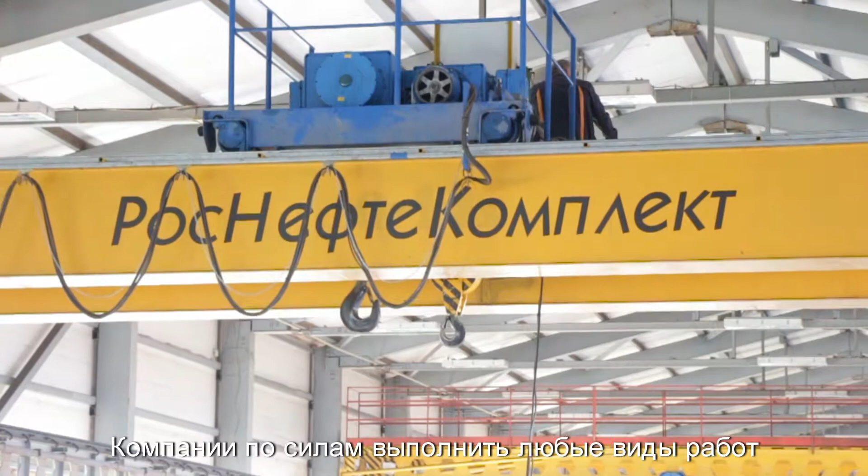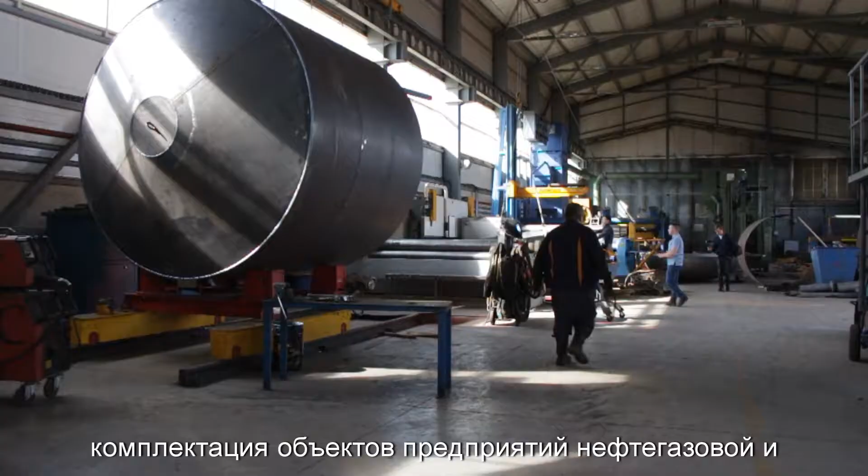At the moment, ROSNEFTEKOMPLEKT has a wide range of services. We are capable of fulfilling different activities: construction and reconstruction, fabrication of packaged products, fabrication of tanks and vessels, fabrication of steel structures.

Engineering procurement for companies in petroleum and power industries. R&K is a big and coordinated team. Our specialists have got everything to resolve process tasks of any complexity: professional knowledge, high working efficiency and commitment, pursuance of perfection and teamwork skills.

Engineering and technical staff possess high-level background and are able to perform timely and qualitatively the whole range of works related to construction of process facilities in the petroleum industry. ROSNEFTEKOMPLEKT performs as a general contractor while implementing large-scale projects on a turnkey basis.

In order to fulfill construction and installation activities in full scope, the company is equipped with special equipment and machinery. Total number of available equipment and machinery owned is over 100. For the time of operation, ROSNEFTEKOMPLEKT performed a great scope of engineering, construction and installation activities.

Our clients are international companies such as MOL Group, Vostok Energy, Transneft, Rosneft Oil Company, Lukoil, Tatneft, Gazprom Neft, Sibur Holding, Irkutsk Oil Company. ROSNEFTEKOMPLEKT owns 2 bases for engineering support services with a total area of 5 hectares.

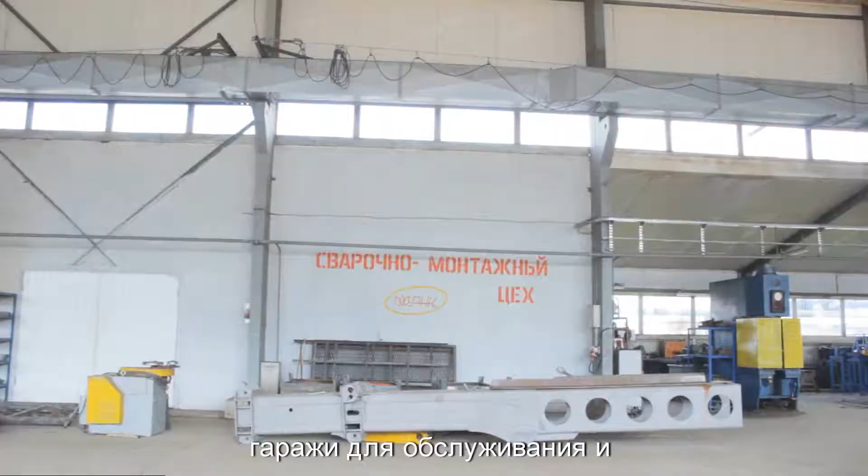These have warehouses, maintenance workshops and special machines, fabrication shops for modular packaged units, tanks and vessels, steel structures and process units. The shops are equipped with all required machines as well as welding, process and lifting equipment.

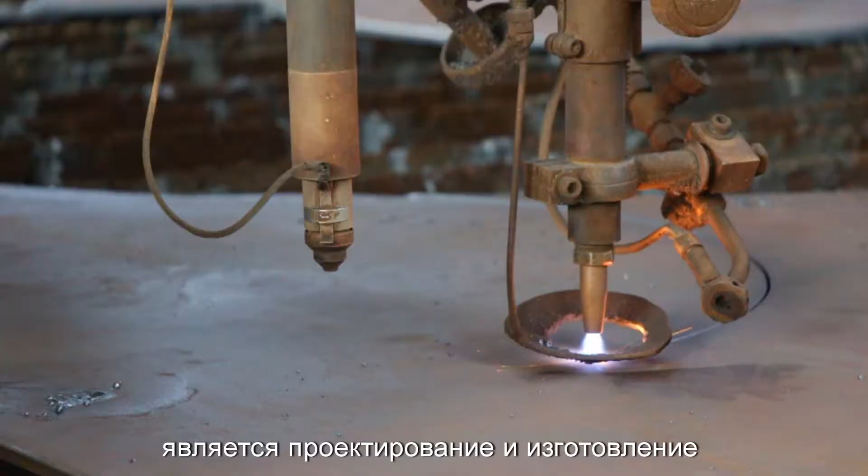One of the company's streams is engineering and fabrication, followed by installation of modular packages. All products are ready-to-operate products that require minimum assembly on a construction site.

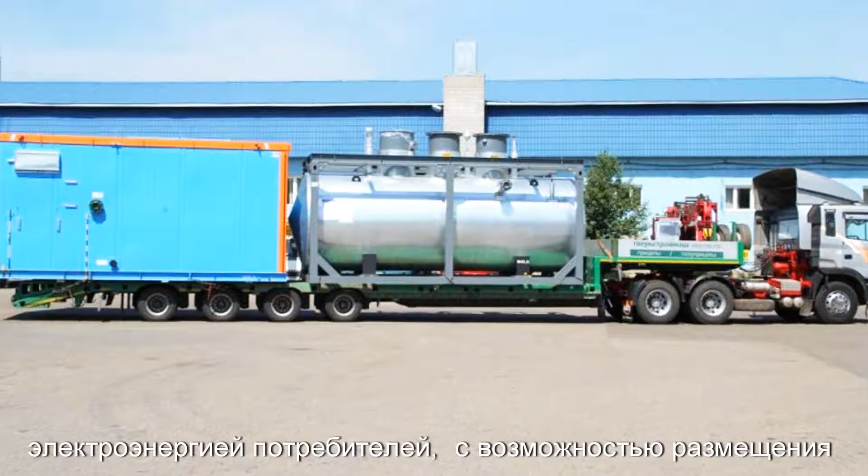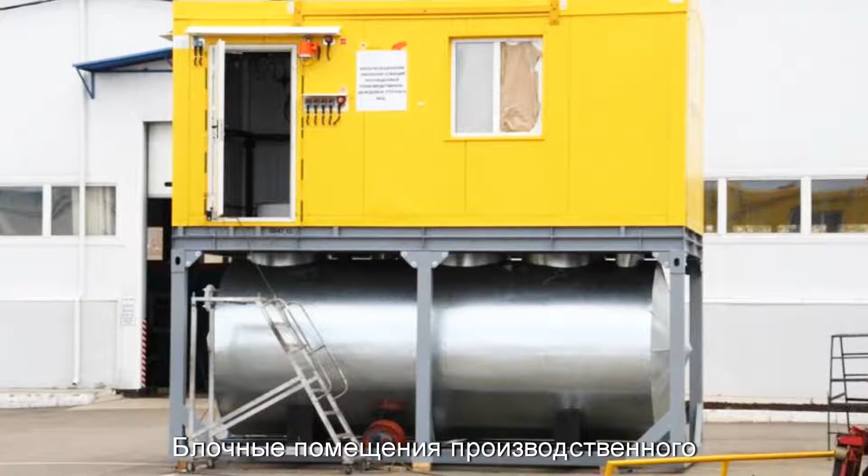Quality and quantity metering stations in a modular container, diesel generator stations in modular containers to provide clients with power, an option to allocate distribution gears and communication relay stations, modular packaged premises to allocate process equipment adapted to maintain required climate conditions, modular pumping stations for oil, water and chemical pumping, modular premises for production and household use, control rooms, laboratories, checkpoints, workshops, modular containers for warehousing and accommodation.

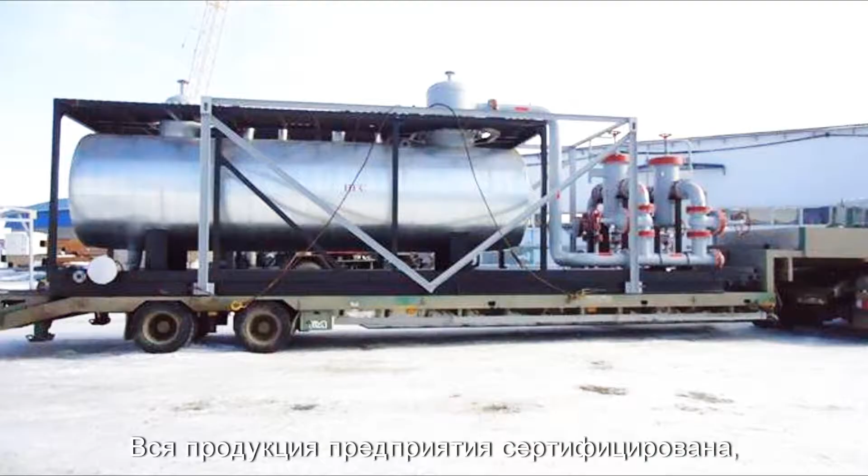The products are fabricated in accordance with technical regulations and standards. All company products are certified and ISO 9001-2000 has been implemented. ROSNEFTEKOMPLEKT has grasped technologies and certified production of tanks and vessels.

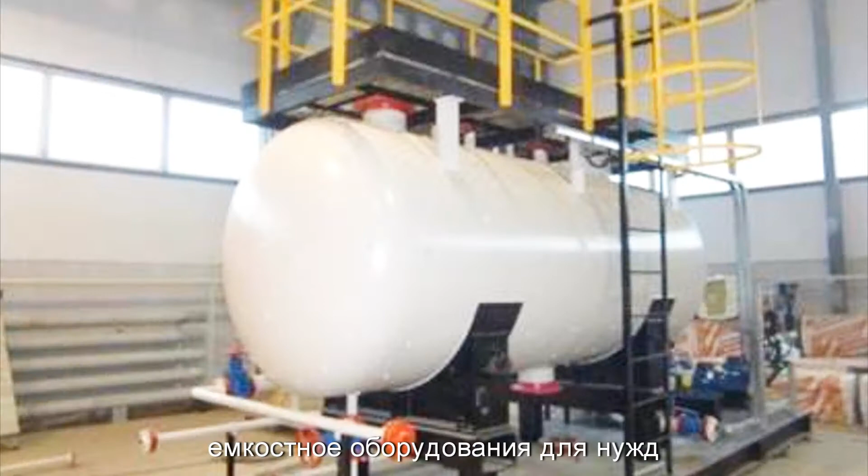Steel welded tanks and vessels production line is set up. Standard and non-standard vessels and tanks are fabricated for the needs of refineries, gas treatment plants, chemical industries, for construction of gas and oil pipelines, as well as a wide variety of industries where tanks and vessels are required.

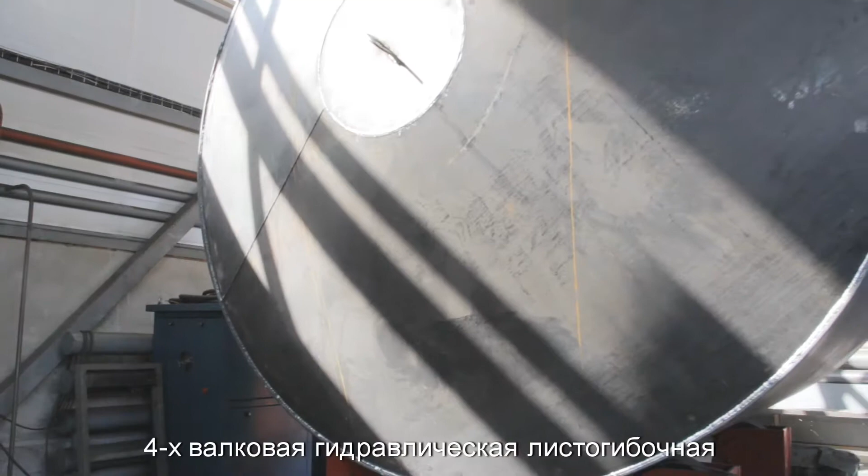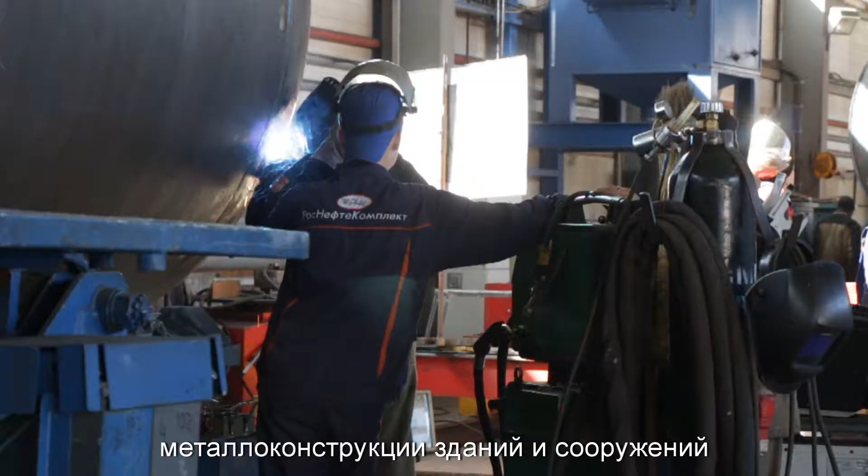ROSNEFTEKOMPLEKT fabricates steel structures of any complexity such as steel structures for buildings and facilities, columns, beams, trusses, framework, crossbars and stands, bracings, stairs, platforms, guards, pipe racks, floodlight towers and lighting rods, pipe supports, steel fences and enclosures.

Special equipment is used during steel structures fabrication: plasma cutters for cutting of all steel grades, guillotines used for steel chopping, and welding equipment.

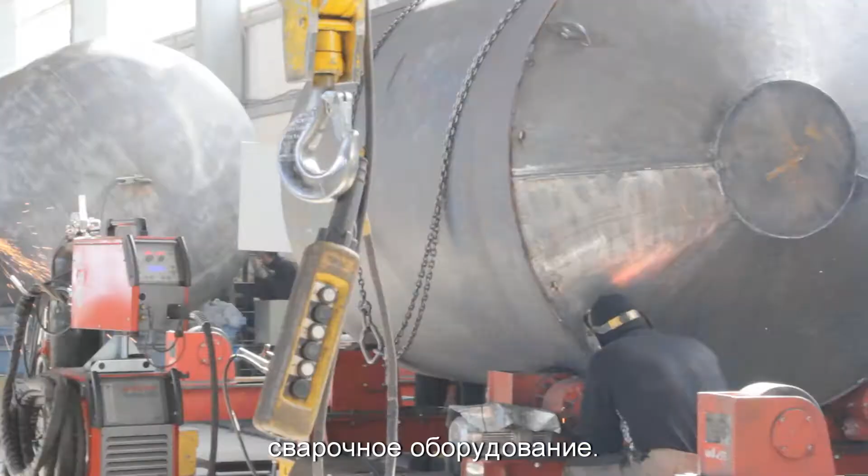The company is capable of producing 500 tons of steel structures per month, and this is not a limit. An ambitious program of re-equipment will double the efficiency due to upgrading of existing capacities. 5 to 6 thousand tons of steel structures are produced from the shops annually.

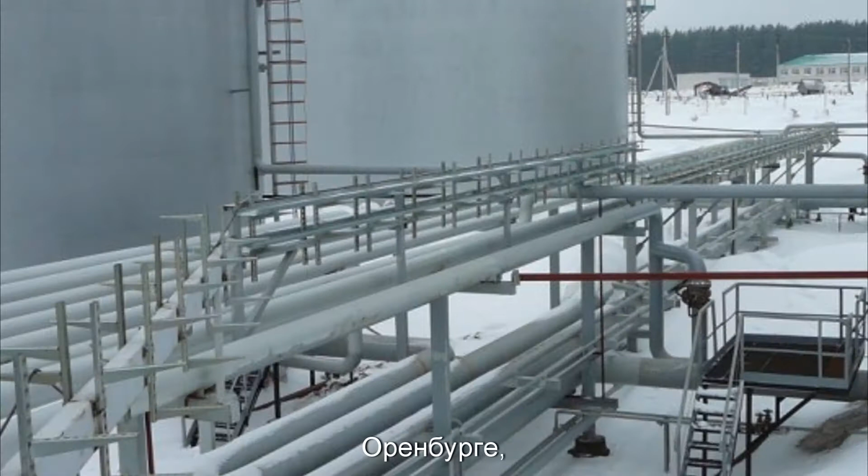The geography of the company is also impressive. The team has worked in Samara, Syzran, Krasnoyarsk, Orenburg, Perm, Saratov and other Russian cities.

We fabricated and installed 5 tanks, process equipment, pipelines and offsite interconnecting pipe rack. Ground leveling was also performed.

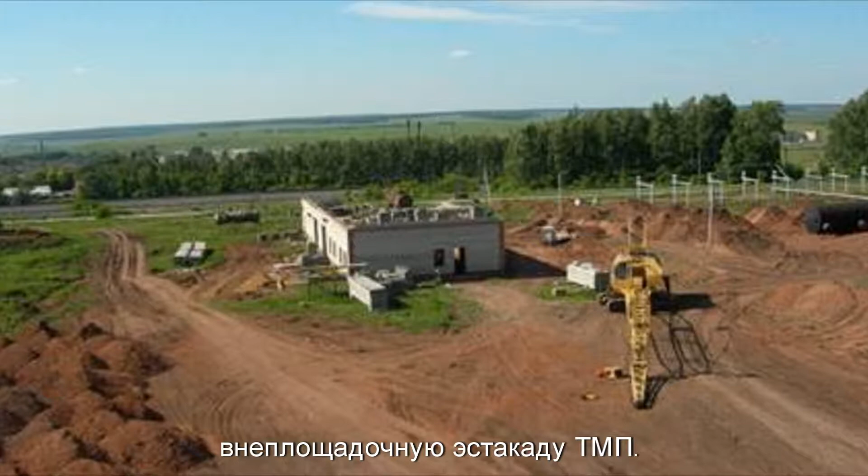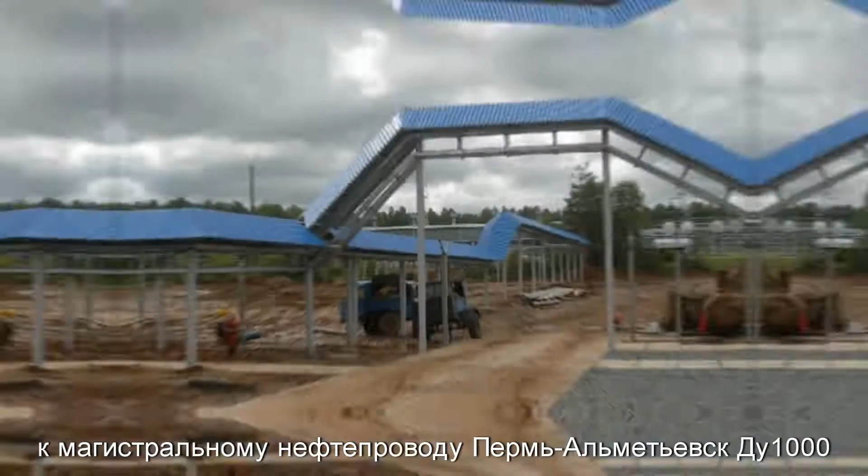A year after, in 2006, our specialists provided a large scope at the Uralskaya transfer and acceptance point with a tie-in to the DN1000 Perm-Almetyevsk oil trunk pipeline. Reconstruction of the oil pump station, along with the replacement of existing pumps with electric-driven duty standby ones, was performed under the contract. The test laboratory, tying point to pump station, safety valve platforms and pressure maintenance unit were reconstructed.

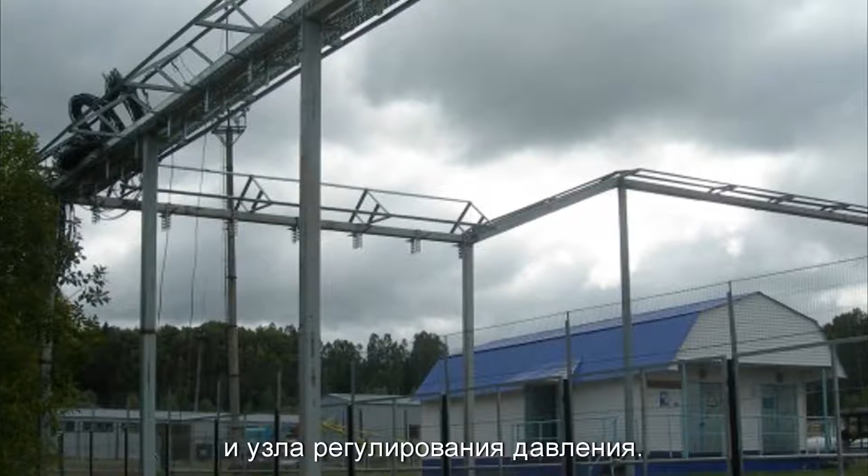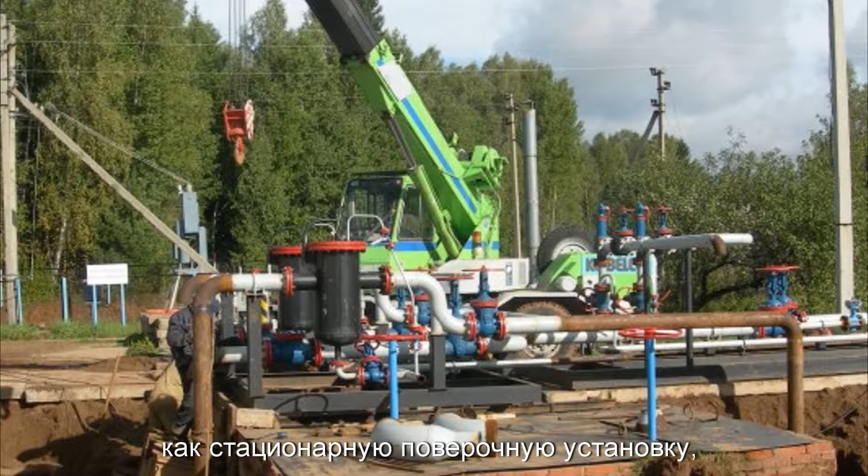The Uralskaya transfer and acceptance point was built for Uralskaya Oil Company. We did installation of large-sized equipment such as fixed calibration units, filter unit platforms, underground drain vessels, control room, MCC, pipelines and landscaping. 2007 was marked with new achievements in our history.

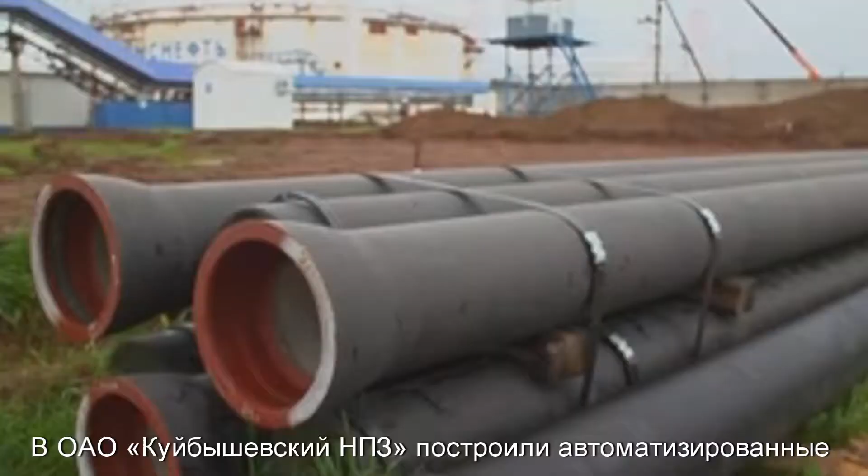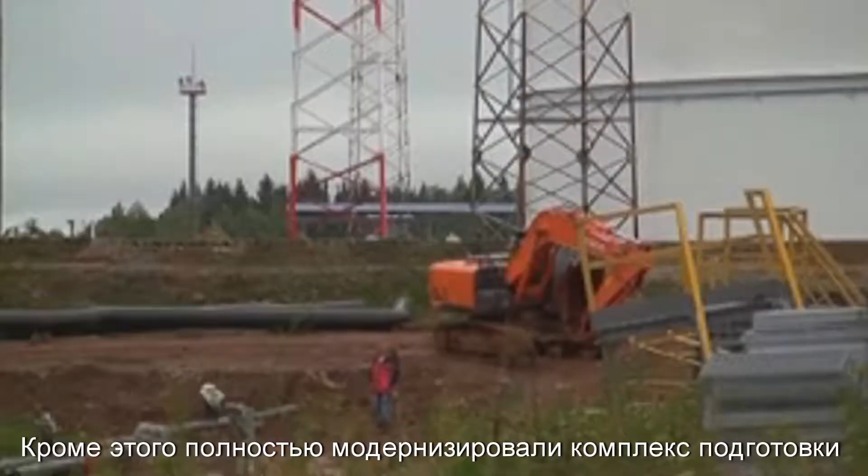Automated additives injection unit was installed in the Kuibyshev refinery. Owing to that, the quality of produced fuel was brought to Euro 3 and Euro 4 standards. Besides, the whole plant for oil treatment and delivery to trunk pipelines was upgraded, from warehouses and utilities to the flare system.

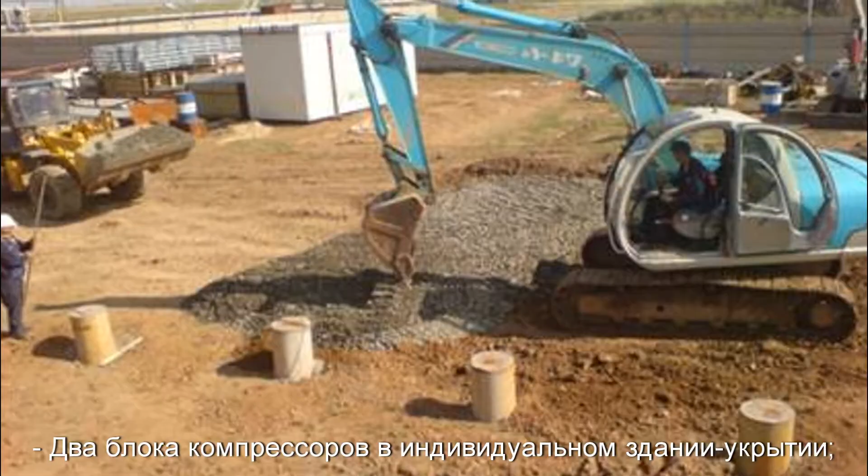Our specialists built a gas compressor unit at a low-tonnage fuel production plant in 2008. The equipment package consisted of the following units: 2 compressors in an individual shelter, 2 closed-circuit water cooling units, interstage gas cooling for each compressor, gas discharge unit, drain unit, switch room container, and nitrogen unit in a container.

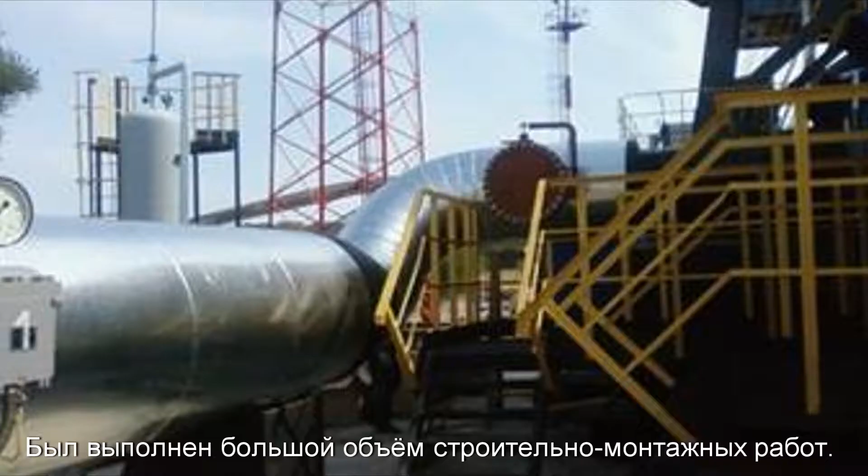This year, we provided reconstruction works at the Samara–Tolyatti–Sokovka gas pipeline, a huge scope of construction and installation activities such as foundations, hookup, start and fuel gas treatment plant.

In 2009, our people were involved in field infrastructure development of the western side of Bortovoy field in Saratov Oblast. It was the first phase of construction of Karpenskaya gas treatment plant. The footprint area provided for the plant, along with the flare system, was about 19 hectares, and this task was successfully resolved.

Everything for successful and uninterrupted operation of the field was installed at the gas treatment plant, including laboratory, garage, boiler house, water supply and firefighting facilities, transformer substation, production and household premises.

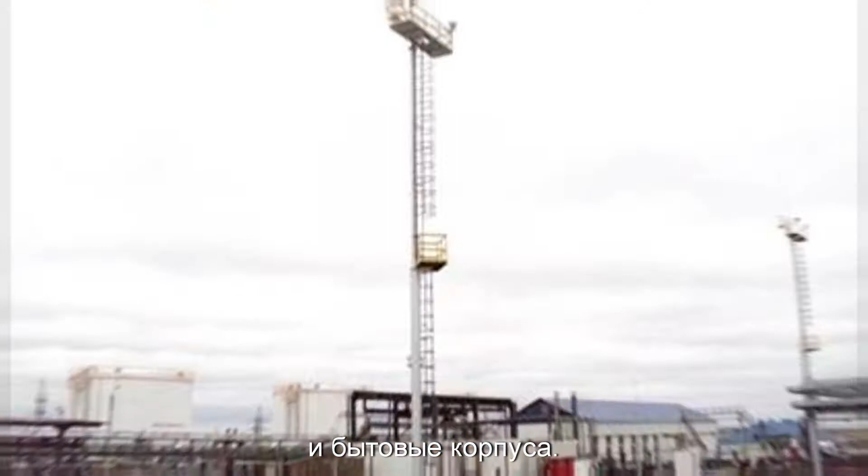R&K also performed construction of effluent treatment facilities and a sewage pumping station as part of reconstruction of the Pokrovskaya oil treatment unit in 2010. At the same time, the storage tank for treated produced industrial and stormwater was repaired.

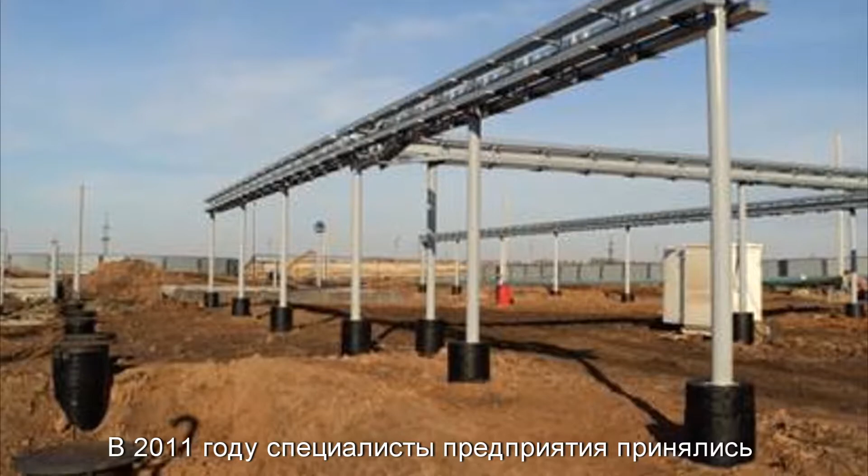In 2011, we started construction of the initial water separation unit at Garshin field. Scope of contractual works included construction and process piping, as well as installation of supporting structures of the initial water separation unit and flare system. Besides, construction of access roads, including installation of protective cases and culverts and a passing road under the Buzuluk-Uralsk motorway, was provided.

Communication networks were installed. Our personnel started construction of a gas compression unit at the Sorochinsko-Nikolsk oil treatment plant and Samadurov initial water separation unit in 2012.

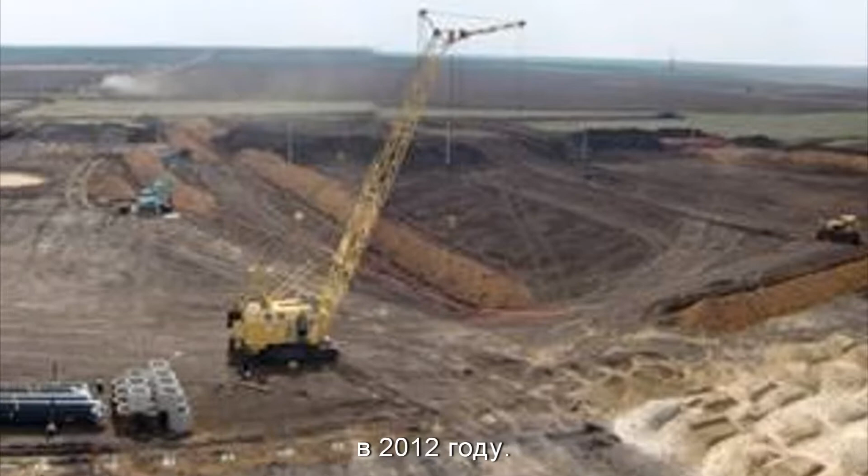Another important facility is a gas turbine plant at Baitugansk oil field, and reconstruction of the oil treatment plant at Baitugansk oil field for BaiTex LLC. Technical upgrading of the Samadurovskaya initial water separation unit, water alternating gas unit, and well-killing fluid preparation unit at IWSU was performed.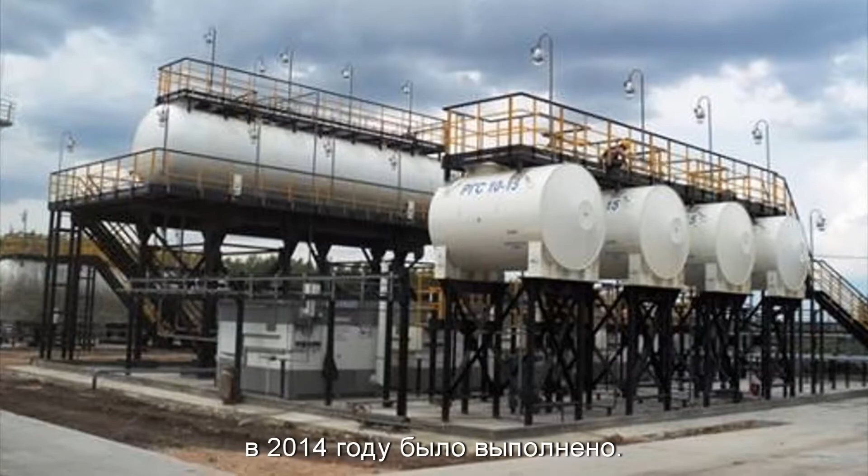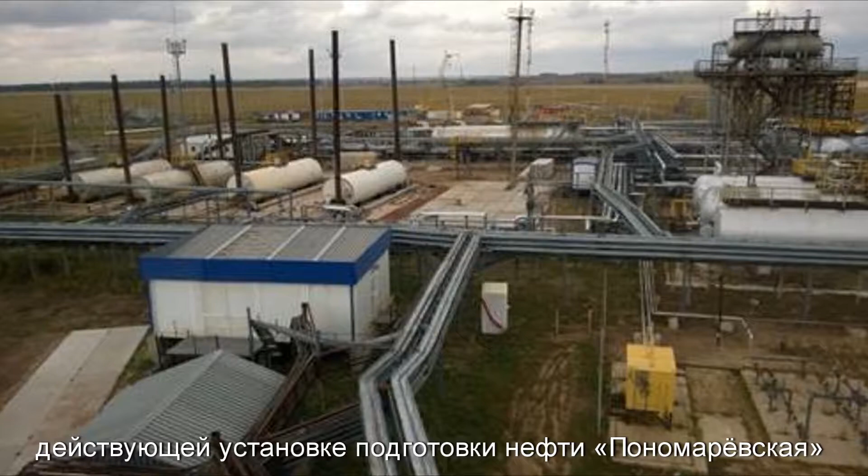A year after, reconstruction of Ponomarev OTP was made according to design assignment, focused on stabilization of process method at the existing Ponomarev OTP, utilization of two-stage separation gas for all needs, achieving thereby 100% utilization of the gas received at OTP, as well as bringing the plant in accordance with applicable standards.

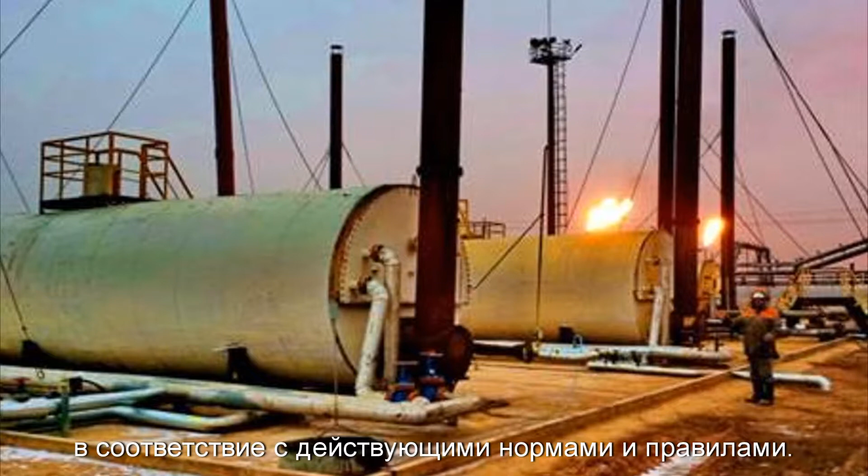Rosneftekomplekt also contributes a lot to agricultural development. Experts of the company fabricate Tamerlan 1800 stone collectors. In addition, Breeze 15 grain dryers are produced. These machines are designed for stable corn flow.

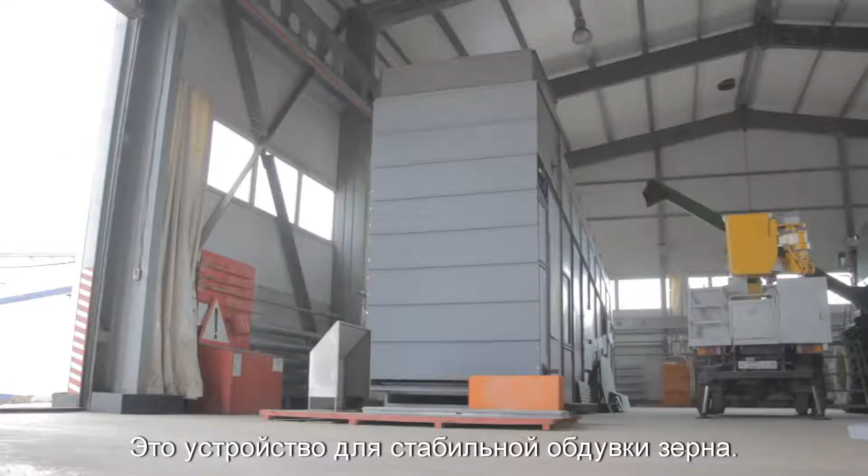R&K established a state-owned farm breeding ground, Stepnoy, in 2014. These areas are bordered with a state breeding ground, Stepnoy, named after Shevkovskych. The core business of the state-owned farm is production of permanent grass seeds, bean cultures, and development of land reclamation technologies.

Only organic products are grown in the fields. Organic fertilizers without the use of chemical plant protection products are used exceptionally. Therefore, the company was awarded the Organic Farming Certificate for compliance with the European Environmental Production Regulations.

Now we have a right to provide our own agricultural products with a relevant European leaf identification mark. This is a sign of compliance with organic standards of the European Union.

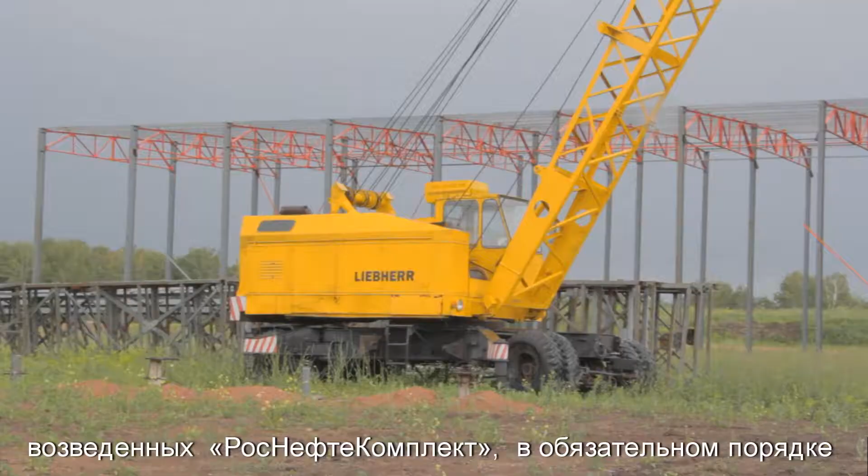Land reclamation is provided in a mandatory manner in the petroleum industry where R&K was involved. Consequently, saving of nature systems and environmental safety are the main points of the company's strategy.

An affiliate company, ROSNEFTEKOMPLEKT Kazakhstan LLP, was launched in Uralsk, Kazakhstan in 2005 for the purpose of extension of service range. The company specialists fulfill construction and reconstruction activities for production companies as well as oil treatment, processing and transportation areas within the Republic of Kazakhstan.

Regular, stable engineering and qualified manpower of various disciplines with high experience in construction industry and within the largest companies in fuel and energy complexes of Russia and Kazakhstan allows ROSNEFTEKOMPLEKT Kazakhstan LLP to fulfill a large volume of construction and installation activities on reconstruction, total overhaul and construction of oil and gas facilities within the shortest time period using its own resources. The main goal is quality of services, and for this purpose the company is constantly improving the construction project management system, procuring the newest equipment and software, and training people.

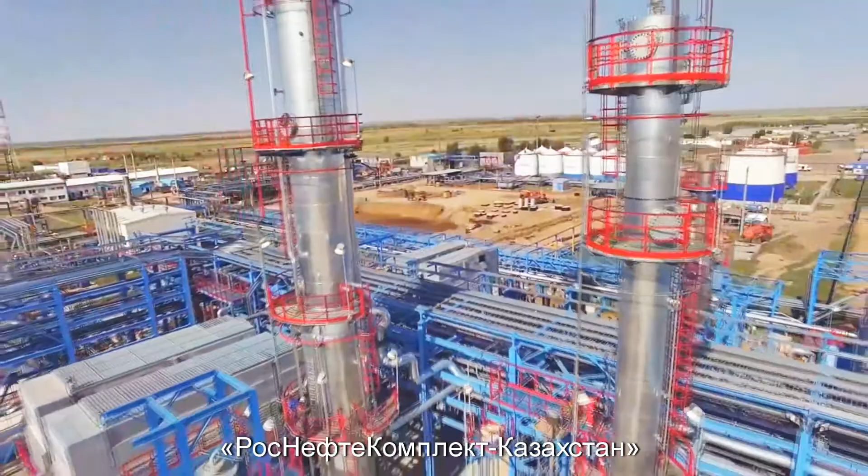ROSNEFTEKOMPLEKT Kazakhstan has a modern fleet of construction and installation equipment, machines and machinery to complete the full scope of construction and installation activities. This fleet is constantly added to and upgraded with new machines and mechanisms procured.

As of today, ROSNEFTEKOMPLEKT Kazakhstan is presented as a general contractor of Condensate Joint Stock Company, the biggest Kazakhstani company, whose core business is processing of raw hydrocarbons at the refinery.

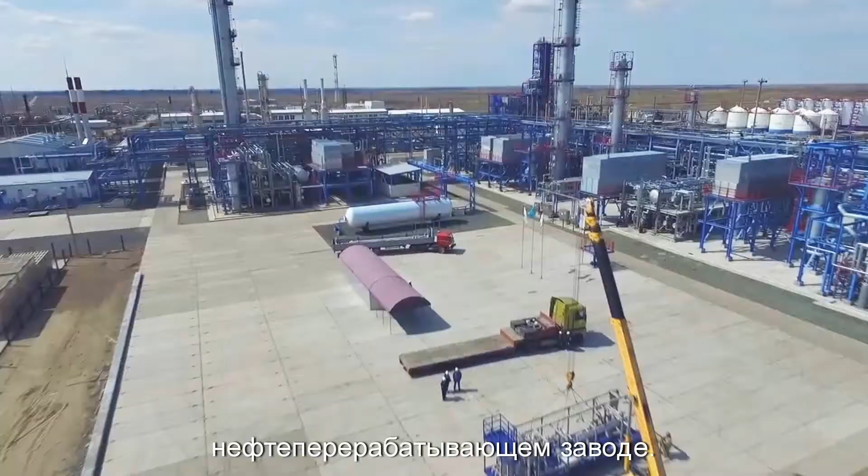ROSNEFTEKOMPLEKT Kazakhstan is one of the sustainable service providers for major Kazakhstani companies such as Intergas Central Asia, Kazmunaygas Exploration and Production, Karachaganak Petroleum Operating BV, and Atyrau Refinery.

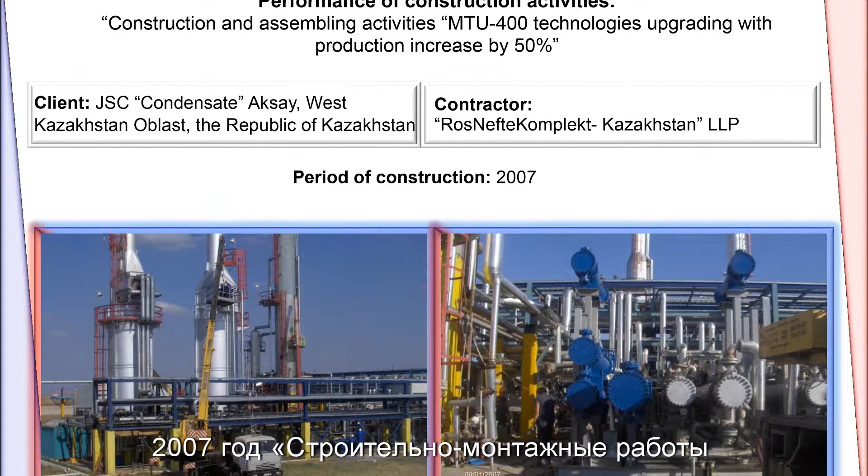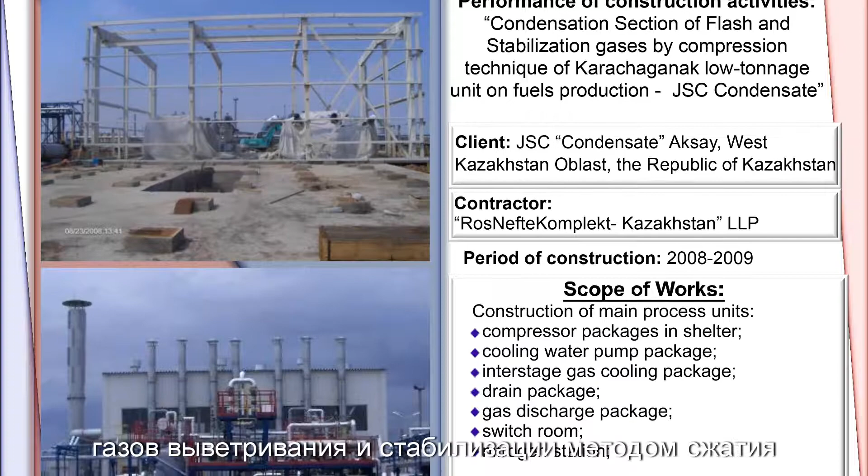The following facilities were delivered over the company's operation. 2007: Construction and installation activities, MTU 400 technologies upgrading with production increased by 50%. 2008-2009: Construction of the condensation section of flash and stabilization gases by compression of the Karachaganak low tonnage unit on fuels production, Condensate JSC.

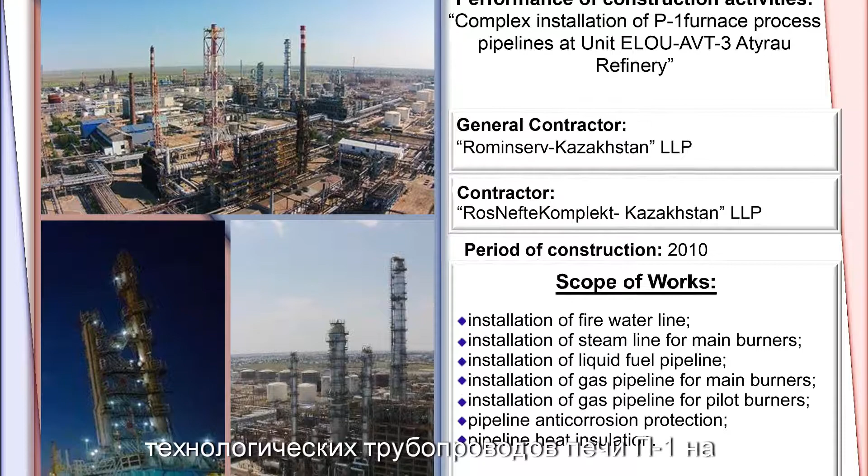2010: Complex installation of P1 furnace process pipelines at unit ELO ABT3, Atyrau Refinery. 2011: Installation and hookup of two 2,000 cubic meter tanks.

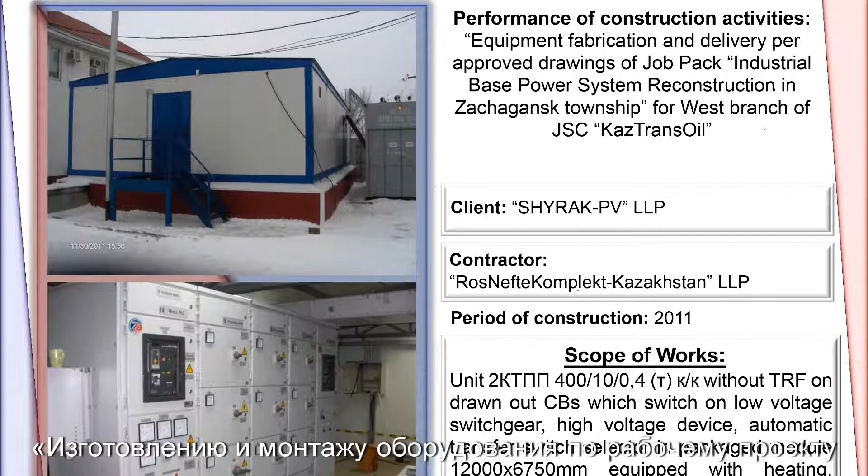2011: Equipment fabrication and delivery per approved drawings of a job pack for industrial base power system reconstruction in Zachagansk Township for the West Branch of KazTransOil JSC.

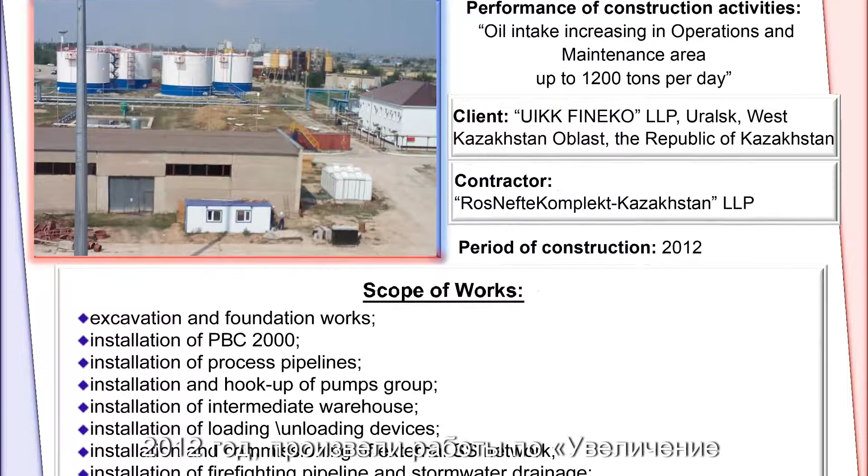2012: Works related to oil intake increasing in the operations and maintenance area up to 1,200 tons per day were fulfilled, along with works on increasing the total capacity of the oil storage tank farm up to 8,000 cubic meters within the maintenance and operation area.

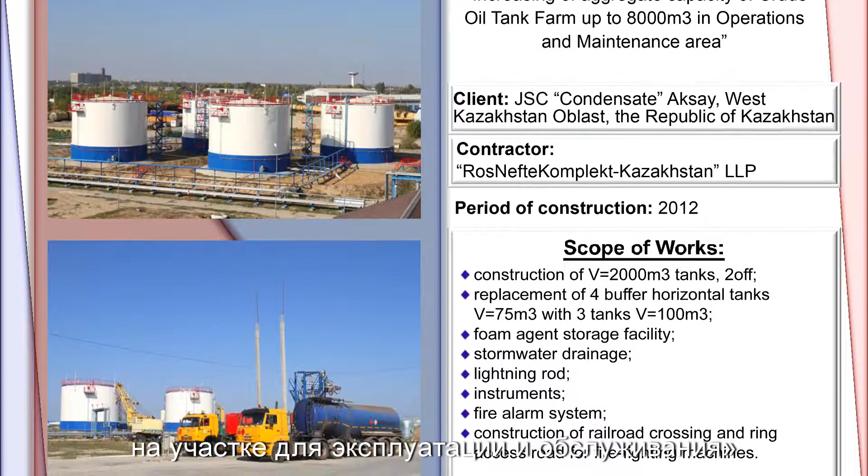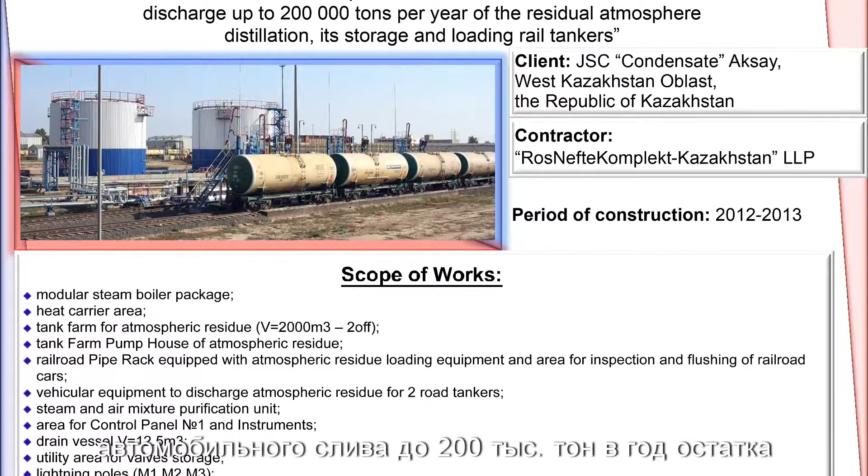As of 2012-2013, construction in the territory of the maintenance and operation area of a vehicular unloading system up to 200,000 tons per year of atmospheric residue, its storage and loading into railway tankers.

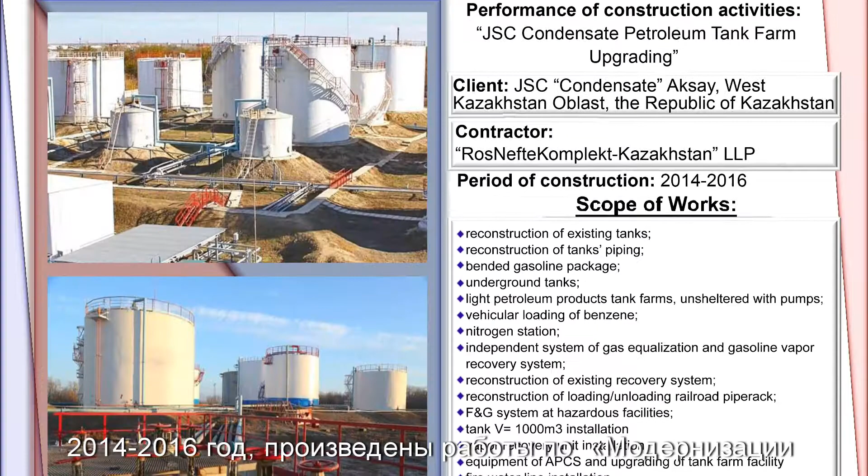An intermediate tank farm consisting of 5 tanks was provided in 2013-2014. 2014-2016: JSC Condensate petroleum tank farm upgrading.

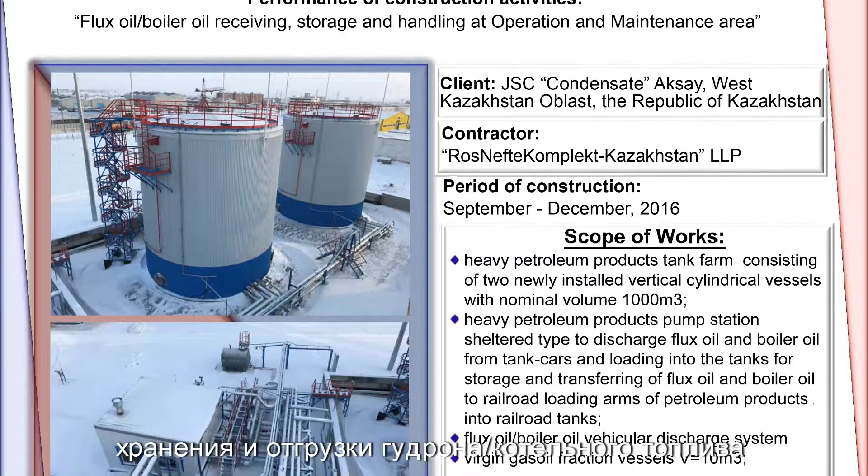For the period from September to December 2016, the project Flux Oil Boiler Oil Acceptance Storage and Unloading Facility at the Operation and Maintenance Area was implemented.

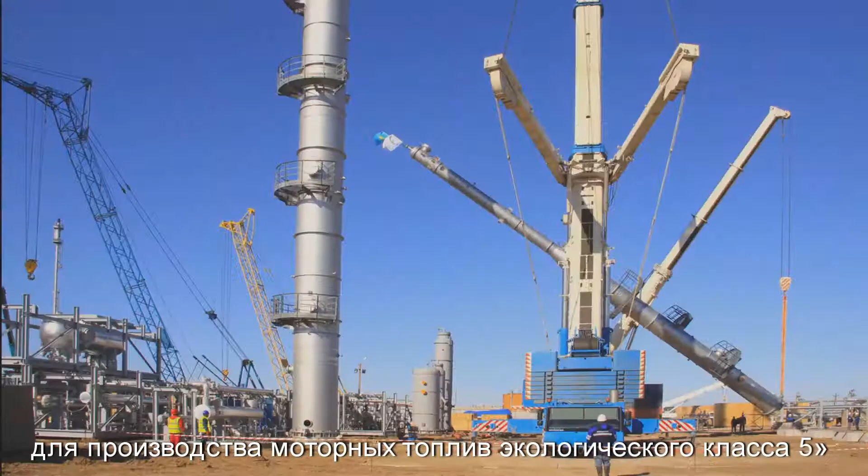One of the biggest facilities built by R&K Kazakhstan is the first startup complex of the second stage of construction of a low tonnage unit to produce emission class 5 motor fuel. The client is Condensate Joint Stock Company. Period of construction: from

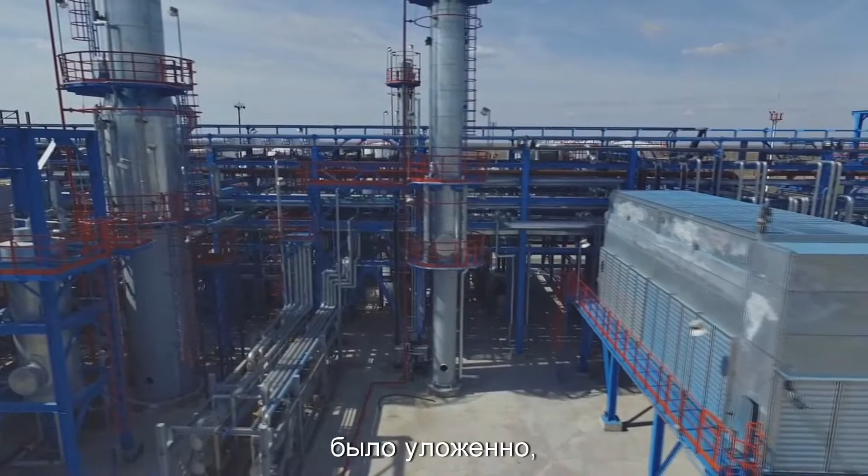2014 to 2016. Over 17,000 tons of concrete and reinforced concrete structures were installed. 35,000 tons of sand gravel mixture and 28,000 tons of crushed stone were produced. About 3,000 tons of metal structures were mounted and installed.

Over 44,000 meters of pipelines. The total weight of the installed equipment was 2,500 tons, and over 138,000 meters of cables were pulled and terminated during the reconstruction period.

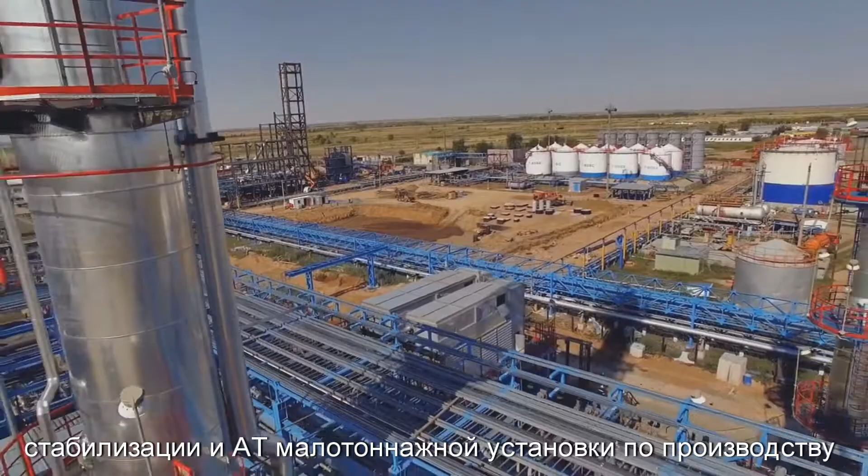ROSNEFTEKOMPLEKT Kazakhstan is constantly striving towards new levels of technical and business development. Particularly, striving to move forward leads our company to achieve its goals. For the client, we are ready to make the path from development of a construction project and performance of construction and installation activities to bringing the facility into operation.